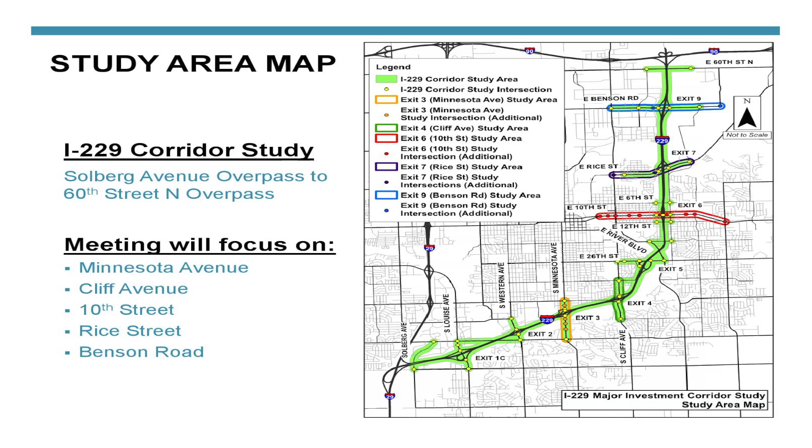But we already knew from previous studies and levels of congestion that at Minnesota Avenue, 10th Street, and Benson Road, we were going to do larger scale corridor studies. And so as we've gone through this entire process, we found out that we had a couple other locations that potentially needed some improvements as well. And so about a year ago, we kind of stopped what we were doing and we added the Cliff Avenue corridor and the Rice Street corridor in. And so we did some additional evaluation on those crossroads as well. And so we'll share that information with you tonight.

This corridor has served us well for many years, and so when the DOT and the city and the agency folks set forth to do this study, what they really wanted to identify is how do we keep the same capacity on the corridor over the next 30 years, the next 50 years. And also, we have some areas that we've had some safety issues along the corridor, so how can we address those moving forward?

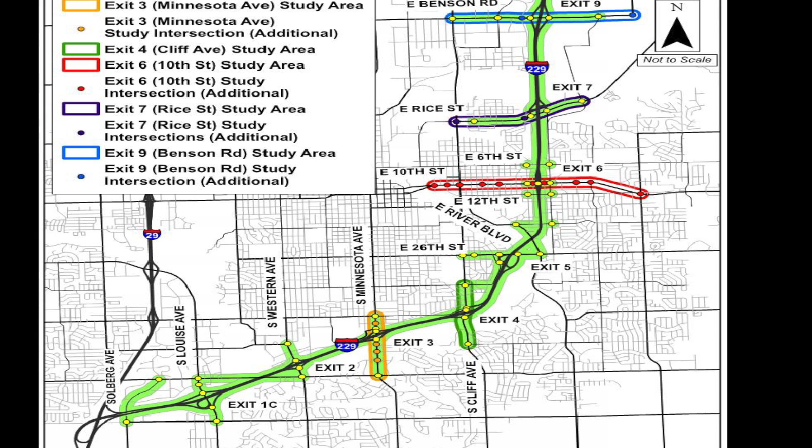These are the agency partners that were involved, the South Dakota DOT, Federal Highway Administration, the City of Sioux Falls, the Sioux Falls MPO, and I just wanted to highlight the South Dakota Highway Patrol because of some of those instances where they have to deal with crashes and try to communicate with others along the corridor, which is very difficult if you drive it every day. They really wanted to bring that to the table and say, if something happens along the corridor, how can we communicate that to people that are driving up and down the roadway so we don't have those secondary crashes or even further crashes that take place. So we're happy to have them as a study partner as well.

The presentation agenda is very simple. I'm going to quickly run through, starting on the I-229 specific upgrades. I'm going to go through the sub-studies and we're going to look at the improvements that we're going to carry forward. I'll spend a little bit of time on each individual matrix, but not a whole lot of time.

Those are in the back of the room. I can really get bogged down, and any of those that you have questions on, we can get to the boards after the meeting and talk more about that. The other thing that we have underneath all of the interchange options for any of the sub-studies, we've done some detailed renderings. And so you can kind of get a real world view of what it would look like on an aerial background. I think they're very helpful for you to see, if that solution would be implemented, really what it would look like.

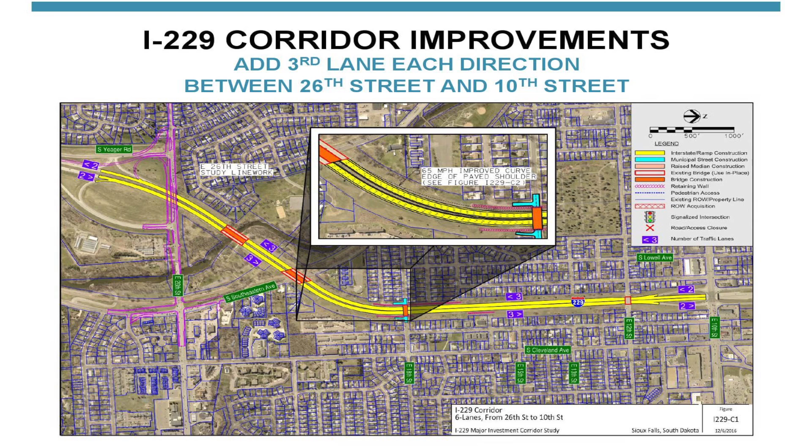And with this study, along the corridor itself, that was really the area that we focused on, that we know we need to do some lane additions. Between 26th Street and 10th Street, right now we just have 2 lanes. We're at that point now that we really need to look at adding that additional lane, so we have a 3-lane section between those. The other thing is between the bridges we have an overpass that exists at 18th Street. The design curve that was in there was about 55 miles an hour, and the corridor is signed for 65.

So if you drive it every day like I do, you go through there and you have advisory signs to slow down. And so we have a couple different options. If you look in the little box right here, you'll see it flip back and forth. We've done some design to look at making that a 65 mile an hour curve. We've got to put up some retaining walls to do that, but it would make the corridor consistent all the way through, which we think would be beneficial.

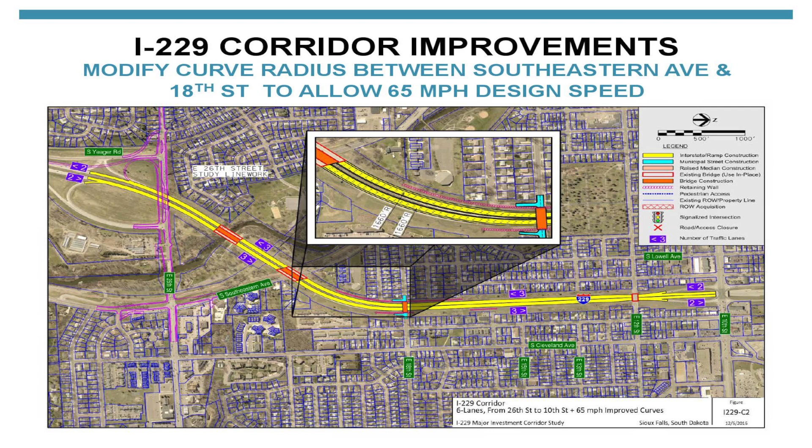When we look at some of the safety problems that we've had, it has been in this area primarily in inclement weather times where we've had slippery conditions. The South Dakota DOT did do some surface friction treatment just a couple years ago that actually has worked pretty well. And so we're happy to see that and be able to integrate that on future projects. But out of all of the corridor, that study that they did in the late 90s really held pretty true. And so this is the identified mainline improvements that we need on the corridor.

As we do any project, one thing that we always want to try to accomplish is serving our multimodal folks better than maybe we have in the past. And so at all of the locations that we cross Interstate 229, we've looked at what improvements we can make in regards to either sidewalk connectivity or for our biking community. As we looked up and down the corridor, each interchange was specifically looked at to see how conducive it is, how it works to get bikers across. Can they do it the same way as we get pedestrians across on a sidewalk?

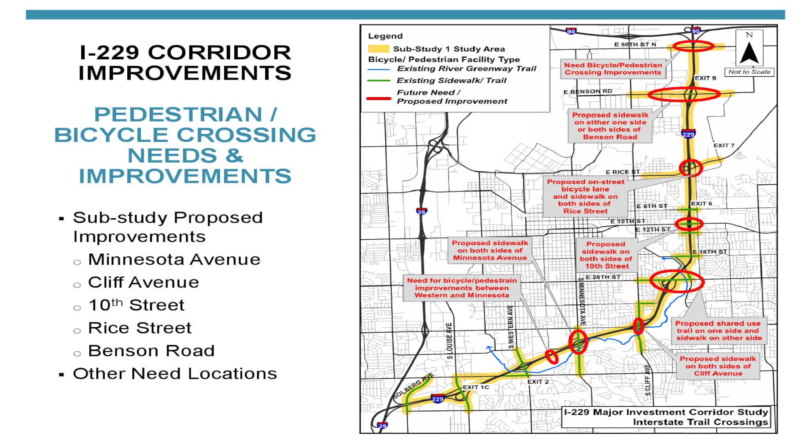And so this is just some ideas that we have, and it'll be fine-tuned as it goes into final design. But as we go up to 60th Street North, just a few years ago we finished the 60th Street North feasibility study, and we identified at that crossing in the future it'd have a shared use path off of that corridor that would be 10 foot wide.

And the idea is then we would have on the north end of the city, we'd kind of have a corridor that had the ability for those that wanted to bike or walk on a lot wider path, and it would get folks all the way over to our new South Dakota 100 or Veterans Parkway corridor. And so as we go on these different crossings, 60th Street North would be a location that bikers could use a shared use path.

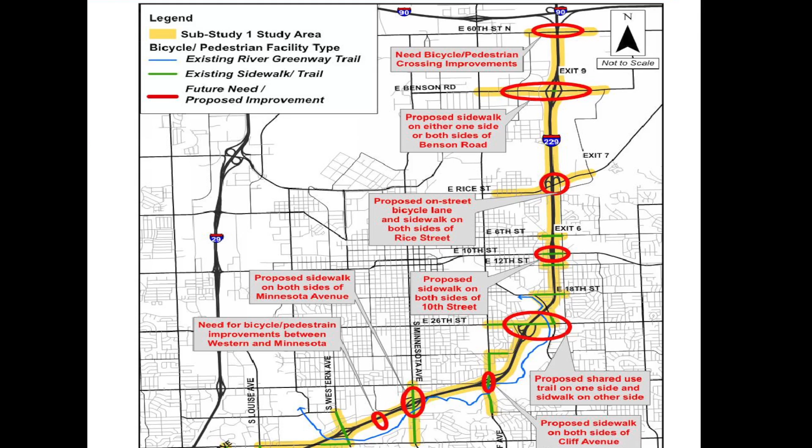As we go to Benson Road, the way that interchange options are setting up, it's more conducive to keeping just sidewalks at that location. As we go down to Rice Street, it currently has dedicated bike lanes on the rural section, and with the amenities of Great Bear and the trail systems, and really the connectivity with Brandon, we want to make sure that we're going to keep the bike lanes on street as we go through the Rice Street corridor.

As we go down to 10th Street, at our previous public meetings and also at our landowner meetings, there was a lot of concern with the congestion and the type of interchanges that we're proposing there, that it may not be the best place for bikes to be. And so in that location, the idea is we have 6th Street that's a crossing, 12th Street and 18th Street that are maybe a little more conducive for bikers, but we will certainly have widened sidewalks on 10th Street going across the interchange.

As we get down to 26th Street, if any of you folks were involved with that over the last few years, we completed the interchange report and the environmental document, and now we're in final design on that interchange. And we will allow for a path that will cross 26th Street that will allow access directly to the trail system. And so that's going to be a nice amenity. When we get to Cliff, we're kind of at that location again where, based on the type of interchanges, it seems like sidewalks are going to work better.

Now, as we get down by Tomar Park and Minnesota Avenue area, Yankton Trail Park, we're actually looking at maybe having a separated trail that would go over the interstate away from the interchange. We got a lot of things happening at the interchange in all of our options, and so that's probably one location where we'd have a completely separated location for people to get to the trail system coming out of some of those residential neighborhoods.

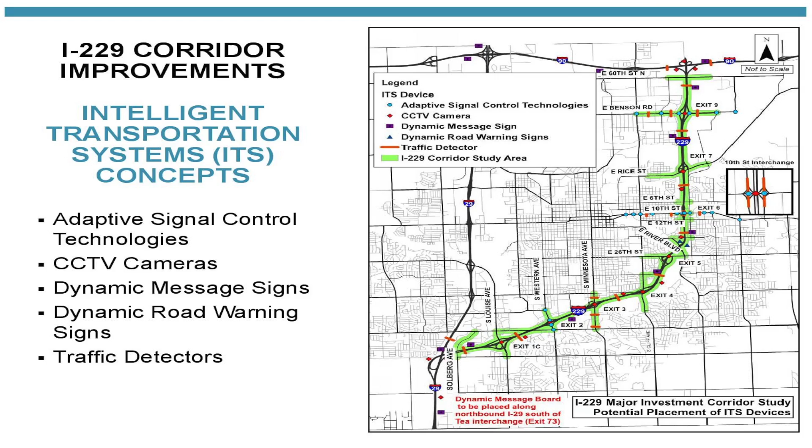So it's real-time cameras that are saying this is how we should set the timings for this type of corridor. And so the City of Sioux Falls just a few years ago deployed their first adaptive network on 26th Street, starting about by Yeager Road, and it goes all the way out past Rosa Park School. And so that was our very first one. They've got a lot of good data from that. The corridor has worked well. We've actually increased our traffic volumes because of it.

And so a couple other locations, the city had a press conference this morning along with the DOT and indicated that 41st Street is going to go to adaptive. We've also identified a few other corridors, Western Avenue and 10th Street so far, that we believe would benefit from adaptive signal control. And so really what that's going to do is it's going to have some benefits during the peak hours, and it's going to have significant benefits on the non-peak hours because it's going to be more reactive to the traffic that's taking place.

Right now when we do a timing plan, we simply are making estimates of the type and amount of traffic that's going through an area at a certain time. And so we set the signals to handle that traffic. This takes it to that one level further. In real time it's looking through cameras saying this is how much traffic is leaving one intersection, the next intersection needs to prepare for it, and this is how it's going to do it. So that's pretty exciting for us. A lot of cities haven't deployed technology like that, and so Sioux Falls, along with the DOT, is leading the way.

The CCTV cameras, really what those are, are standard cameras that the city or the DOT can use to look up and down their corridor. They can detect levels of congestion if that's what you're looking at them for. They can simply do surveillance. Let's say we have Jazz Fest going on, and so maybe they're going to watch the cameras and look at the congestion at the interchanges at Western and Minnesota, and they can adjust the signal timings if they see congestion. So up and down the corridor, we can have those cameras that provide us the ability to monitor the corridor.

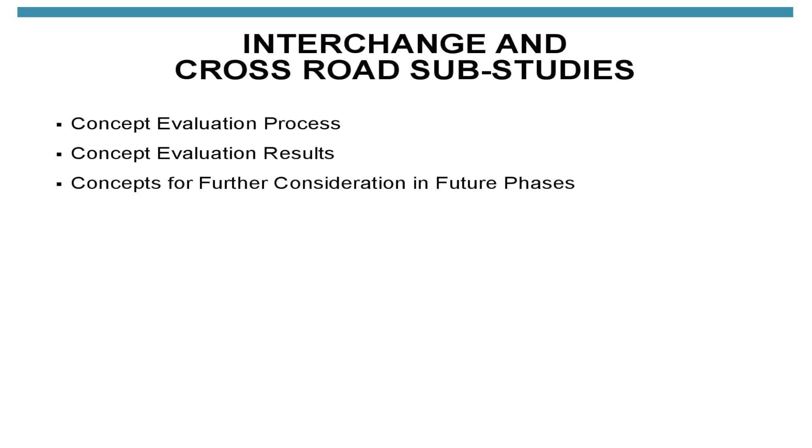So now we're going to hop into what we have for options on the different sub-studies. And like I said, I'm going to go through the options. Anything I show you tonight is something that will be carried forward into the subsequent studies. And all of those we have in the back of the room. And after the meeting, you can simply start. We have sub-study 1, and it goes 2, 3, 4, 5, 6, all the way around. And so you can follow, look at the ones that you'd like to, and skip the ones that you don't. But we'll kind of run through.

And so we were able, through a simulation, to look at the entire corridor and the crossroads all as one model and look at delay associated with that. And so it was different than looking just solely at one intersection or one corridor at one time. And what that model would do is if you constrained a corridor and there was a level of congestion, traffic would choose to go to another corridor based on travel time.

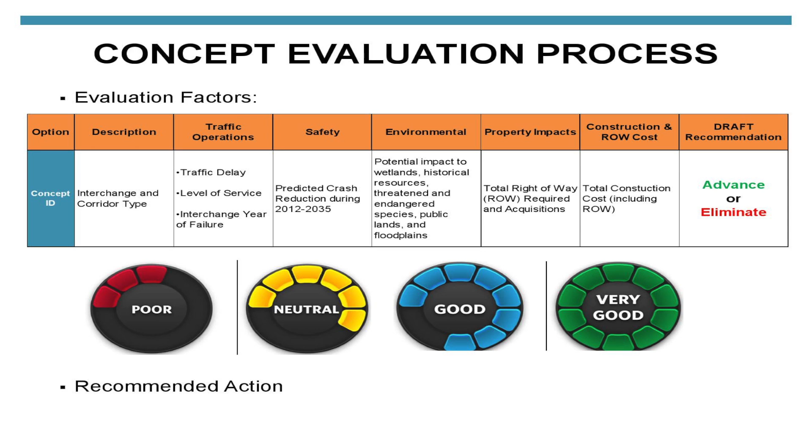And so when we look at traffic operations, that's one component that we used in our matrices to try to see how well an option worked. And so as we ended the study, we started taking our options, building them into the model, and seeing how they reacted. And so if they reacted well, that was probably something that we carried forward.

Levels of service, a lot of times you'll hear us talk about levels of service as A, B, or C. If they're one of those letter grades, that means the corridor is probably working fairly well. If it's D, E, or F, we probably have an issue. And so as we started looking at the Rice Street corridor and the Cliff Avenue corridor in our traffic analysis, we started to see some of those items pop up, and that's why we added them in as sub-studies to better evaluate those corridors.

And so we looked at all of the intersections and the interchanges specifically, and so our improvement options are going to be designed to at least level of service C or better. And so that way we know we can manage through that year 2035 or beyond. And then we also did an interchange year of failure. So if we looked at an alternative, we wanted to say, okay, if we implemented this alternative, how long would it last? And so it kind of gave us a gauge.

If we implemented improvements at one location, maybe it only lasts 20 years. If we implemented them at another location, maybe it's 30 years. And it gave us this idea of how we could maybe prioritize the improvements better. And so that was important as we looked in trying to figure out which interchange or which improvement would be done first.

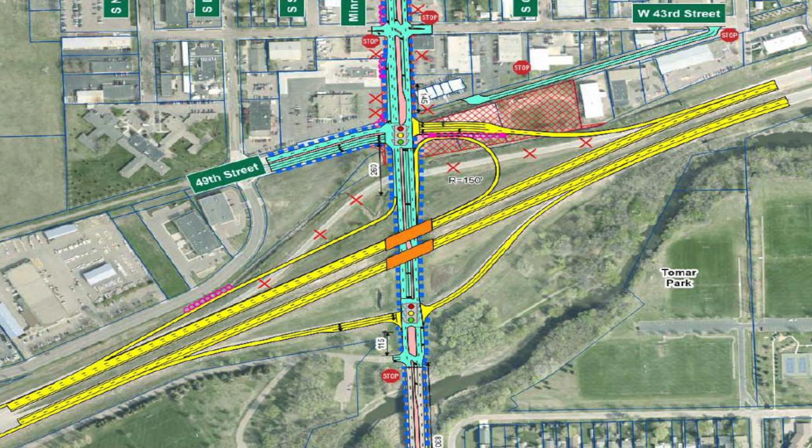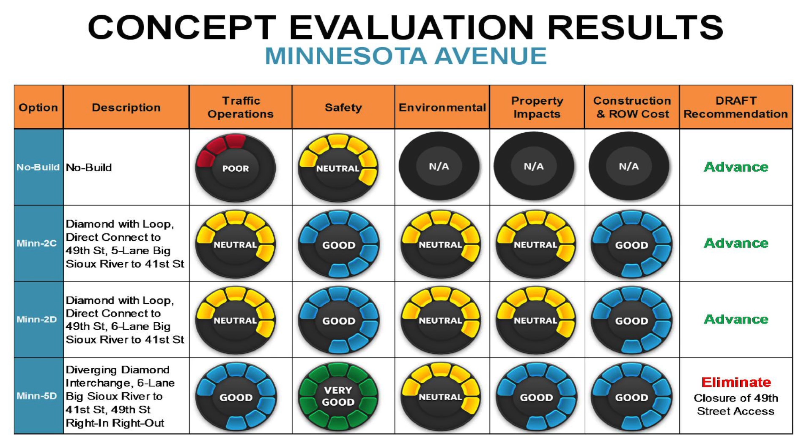And so the next group of options that we had for Minnesota was single point interchanges, and all of you are familiar with them, whether you know what they're called or not. I-29 and 12th Street, I-29 Madison Street, I-29 Benson Road, I-229 and 10th Street, they're all single point interchanges. And what that means is you have a common signal at one location and you don't have a signal on each side of the interchange.

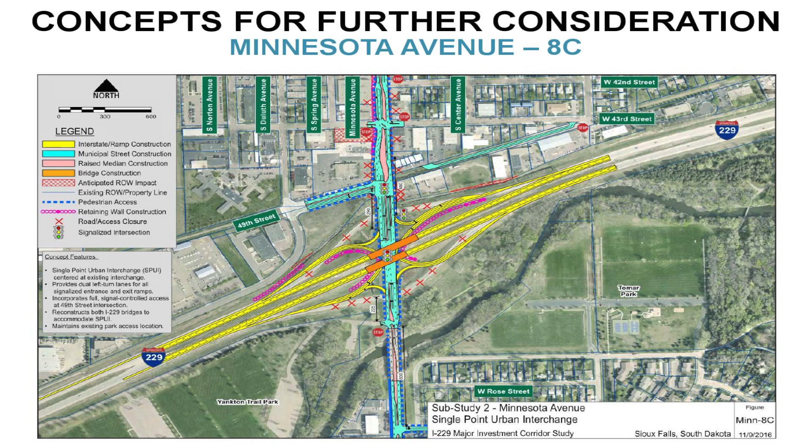And so we have a couple variations of this option. One is, this is a conventional single point with tight right turn ramps or right turn lanes. The problem is, in this option here, we're so close to 49th Street that anyone that would come off of I-229 to go northbound would be restricted from taking a left onto 49th Street, because we don't have enough room for these people to merge over and get into the left turn lane. So we actually would have a divider there that would not allow them to do that.

And so this is a similar option, just with a wider street. And then our caveat to that is, instead of having those folks turn in here, let's just peel the ramp farther away and line it up with 49th Street, similar to our loop ramp option that we had. And so if we do that, we're able to take the interstate traffic and they can either take a right, go through, or if they want to take a left, obviously they'd use the other ramp.

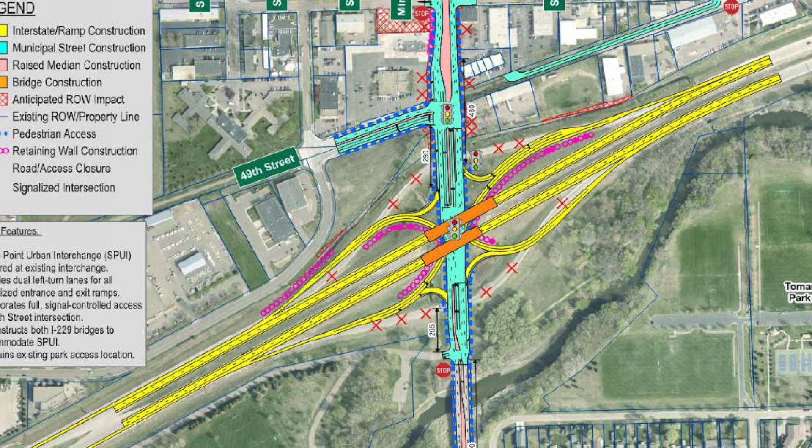And so there's a variety of options. Both of those allow us to have 49th Street as an intersection, as well as have an interchange that manages the traffic volumes that we have. Again, this is just the result matrices. And then we're going to keep going on to Cliff Avenue.

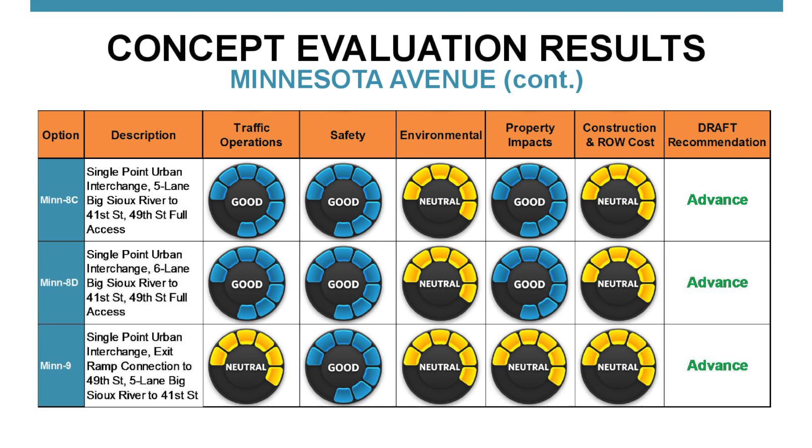And so Cliff Avenue, for the longest time, has had this interior ramp between the signal at 41st Street and the signal at the South Side Terminal. And so the real struggle with this was getting enough room for either the vehicles queuing to go northbound on 229 and those conflicting with the folks that wanted to take a left to get onto southbound I-229. And so really what this does is, similar to Minnesota, instead of those folks taking a left here, we simply would put them on a loop ramp and take them around the outside. And we're getting rid of that congestion from taking place.

And so if you drive this corridor a lot, this is primarily the congestion area. We have a high peak volume in the morning with the school traffic. Certainly that's kind of dissipated in mid-afternoon. The PM peak hour through here actually works better than in the morning. And so this is one option to manage that. As we widen Cliff Avenue to the north, we certainly have some residential property impacts, and so we're trying to look at solutions to minimize that.

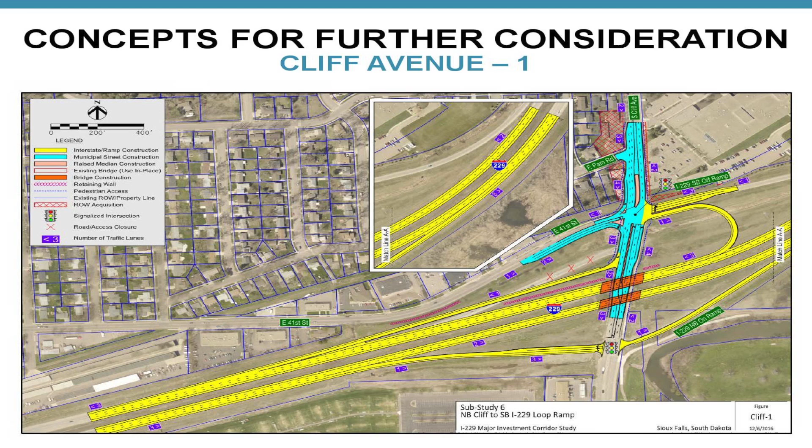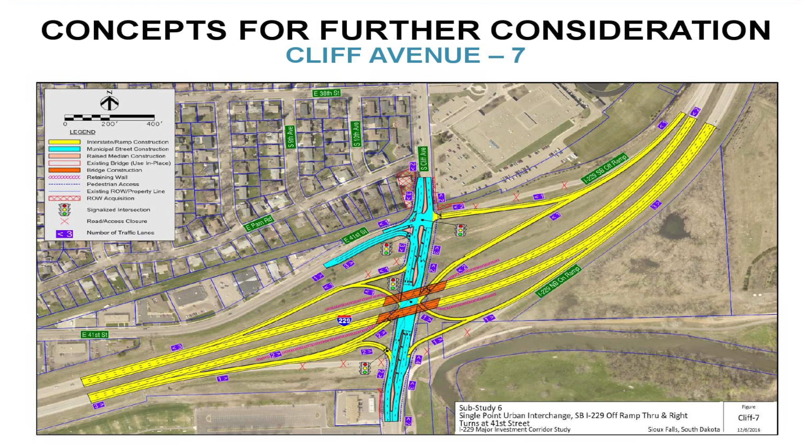And so we looked at kind of a combination of the options where it's very similar with the single point interchange and realigning this ramp again like Minnesota over to Cliff Avenue to the signalized location, and that does meet our safety and level of service criteria. So that in itself becomes a good option, and it shows the least impact to the homes along Cliff Avenue.

Again, this is the comparative, and each one you are going to see the no build, because when we carry it on to the next studies, we've got to make sure we compare it to that. And so on the traffic side of things, we're in pretty good shape as we look at these options. As you can see, the one option, we had poor when we had the dealings with all those acquisitions.

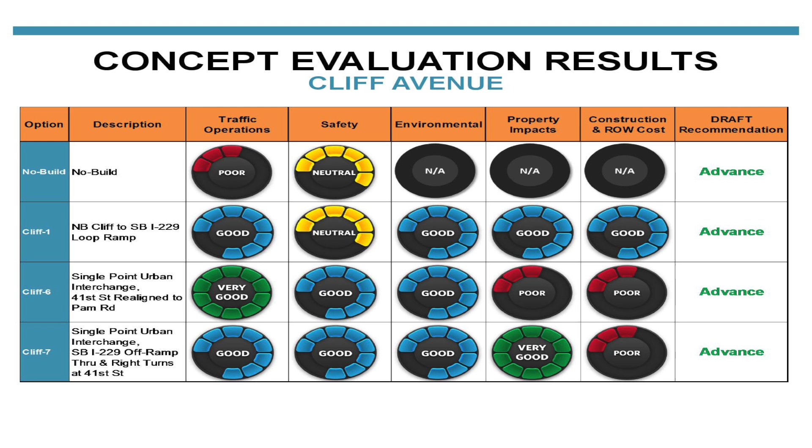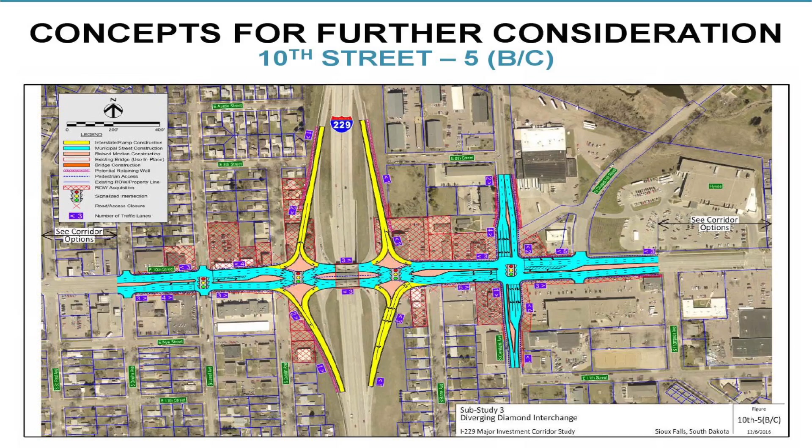When we look at this interchange here, it does a very good job of moving traffic on 10th Street. The left turns now become free movement, so when this movement here is stopped, all of these left turns can enter the corridor at an uncontrolled location. I think over the next 10 to 20 years, this will probably be the leading interchange geometric design in so many communities, because they retrofit really easily to the old standard diamond interchanges.

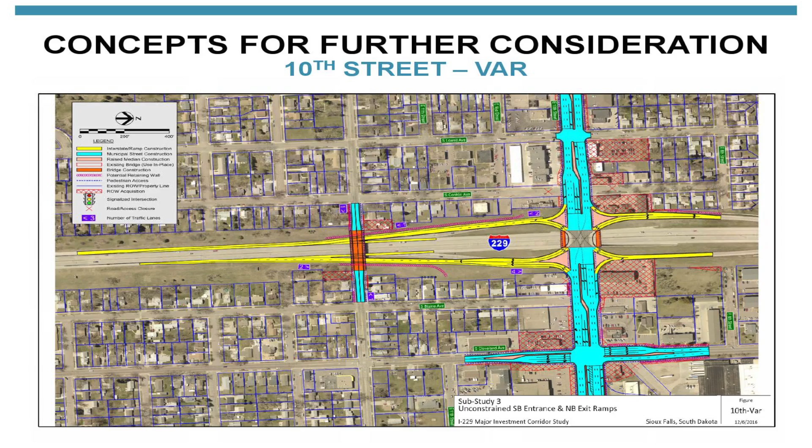One other consideration that we had is when we start looking at this heavy right turn movement and heavy left turn movement, one thing that we would like to provide for is lane balance. Right now, people get off, and every once in a while you see a sneaker come in and use the inside of that lane up to 10th Street. Since these movements are generally comparable, putting a dual lane off ramp there would provide for that lane balance and a little higher level of safety along the corridor. We'd also look at extending this ramp due to the high volume of left turns coming off of it.

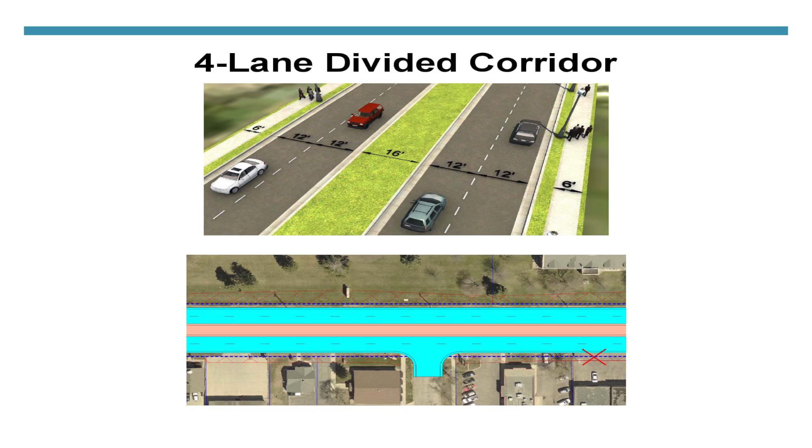Along the corridor, we evaluated it at a 4-lane, 5-lane, and a 6-lane. 5-lane is what's out there now, with the 2-way left turn lane. A 4-lane would be 2 lanes in each direction with the raised median. A 6-lane would be 3 lanes in each direction with the raised median. What we found is for a majority of the corridor outside of this interchange, we can manage the volumes pretty well with the 4-lane section. So you'll probably see the 5-lane exist there for quite some time.

But at some point in the future, as traffic increases, having that median in the center to restrict some of those left turns out of all of the driveways and the side streets provides that little higher level of traffic safety, and that's what we're going for. It'll probably be quite a ways down the road before that would happen, but that's something that we have identified for the corridor.

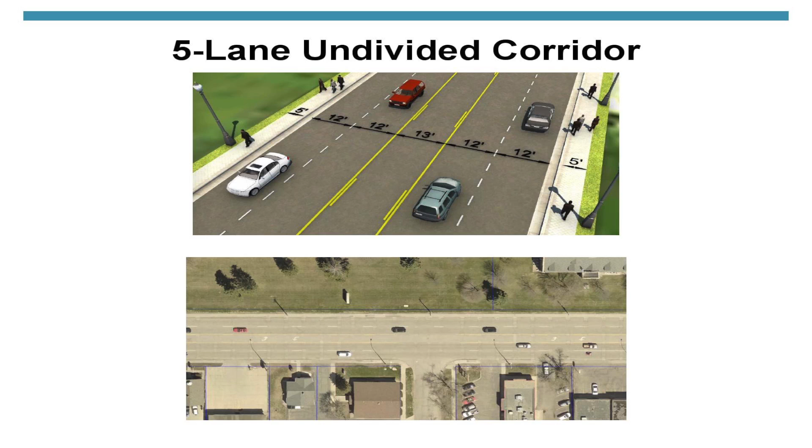This is simply what's out there today: 5 lanes, about 12-foot lanes, and people can turn out of that center left turn lane. There are a couple areas by the VA hospital, and also as we get close to Sycamore, where we don't have any development on one side of the road. That really helps us as far as not having a bunch of driveways in those locations. It keeps traffic moving on the corridor.

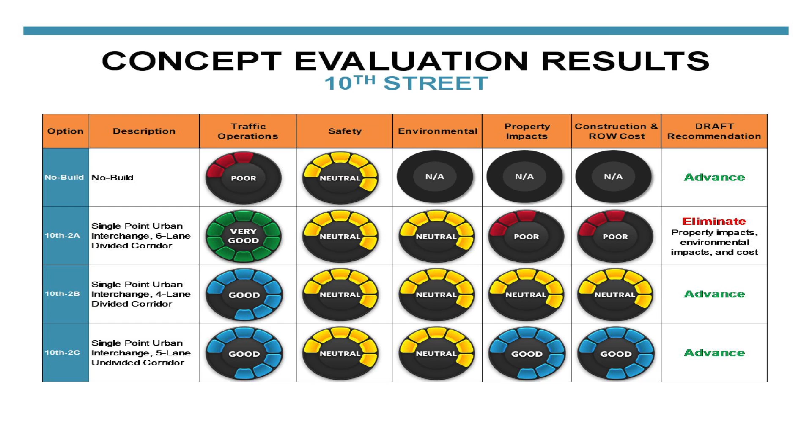We're going to keep moving along the corridor to Rice Street. Rice Street, this is an interchange that probably has one of the lower levels of traffic today. This intersection here was signalized just a few years ago, finally met the warrants to do that. But with the increasing development that takes place on the northeast side of town, the increased development in the city of Brandon, all of the area around what will be the Veterans Parkway corridor, we have identified some strong growth along the Rice Street corridor.

And so to manage that growth, we have some additional lanes that we need. We're looking at from Bahnson Avenue through the interchange that will go to a 6-lane section. Outside of that at this point would go back down to 2 lanes in each direction. This would simply be a retrofit of the current interchange, so it'd be a tremendous amount of turn lane additions is what it amounts to. Additional right turn lanes and additional left turn lanes.

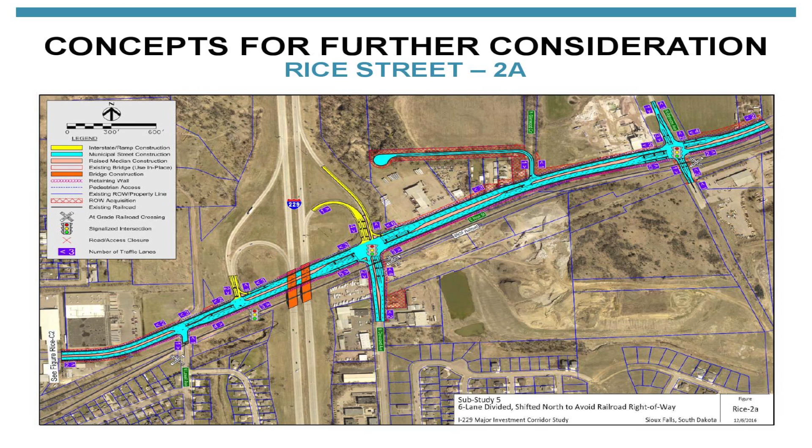One of the concerns that we have is at some level under this design, that intersection gets so large it starts to break down. And so for that reason, we looked at maybe one more option that was a little more out of the box than some of the ones we've looked at, was a realignment of Cleveland Avenue that would take us over to Bahnson.

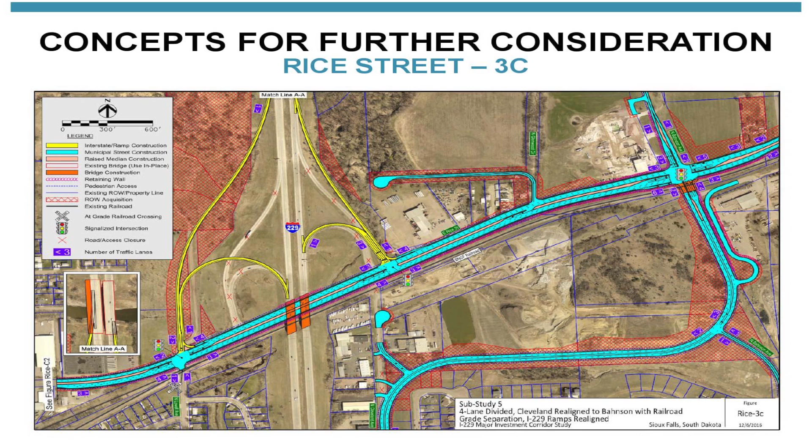And what we do is we take a high level ramp and we don't have that opposing traffic on the south side. We take a high level Cleveland Avenue and we don't really have that opposing traffic on the north side. And so those intersections we can manage better, getting them on and off Rice Street, and that option works very well to manage our traffic. The biggest thing is it's a significant amount more road to construct, and we have some issues to work with private landowners. And so both of them handle traffic. This one maybe would handle traffic for a little farther out in the future than the other one.

On the corridor itself, as we start going towards the downtown area, certainly as we revitalize and keep developing downtown and have a conscious effort to try to get Rice Street pushed over to Russell Street, we want to preserve this corridor as another east-west route. And so implementing the median due to all of these blocks that connect, that's just something that we'd like to do over time to try to increase the safety along the corridor. Right now we have a significant amount of locations where people can take rights and lefts and all of the things on and off the corridor, and by implementing the median at that location, we start reducing some of those conflict points.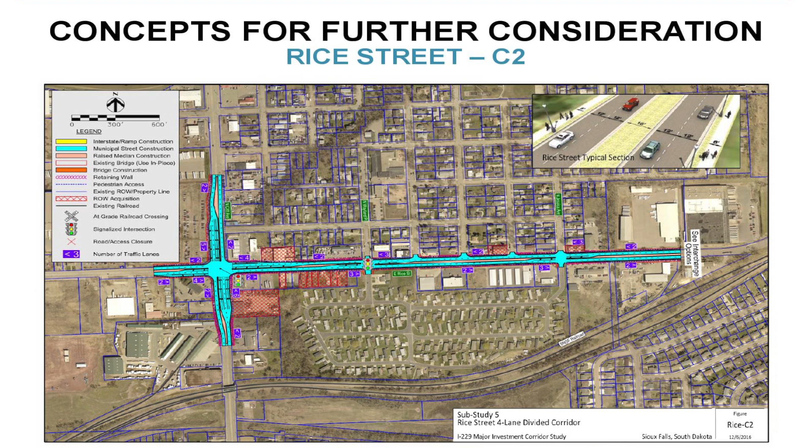Again, here's the evaluation of results. Looking at the traffic operation and the safety, what we're carrying forward, they all do a very good job of managing that. Now we're getting over to Benson Road, which is kind of our last sub-study to the north.

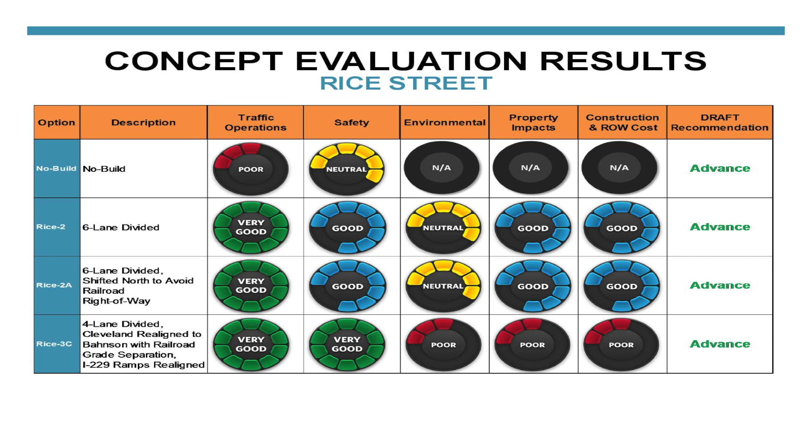A little history on this interchange. As we come at 229 in the morning, this volume is significantly high. It's probably one of the highest ramp volumes in the city right now. We're running between 1,600 and 1,700 vehicles in an hour up this ramp and then into the commercial park that exists. And so our concern is, as development takes place on the east side and we need to provide more time at the signal to manage that traffic, that the interchange is going to have some significant problems.

And so to manage that, we looked at placing a loop ramp, a dual loop ramp that would take traffic. If you wanted to go on Benson Road to the west, you'd simply come off of this ramp. You'd have a free movement that would go onto Benson Road. And we have a dual ramp that would come off. We have 2 lanes in the through direction. And so we'd actually carry 4 lanes over to Potsdam, 3 lanes over to Lewis, and then we'd go back to 2 lanes.

And that's what we need to manage that amount of traffic on that loop ramp. The other obstacle that we have is if we have that much traffic in the morning, we have a similar amount that wants to come home at night. And so we get this very long queue that exists in that outside lane on Benson Road coming back in the evening. And so we've looked at a couple different options.

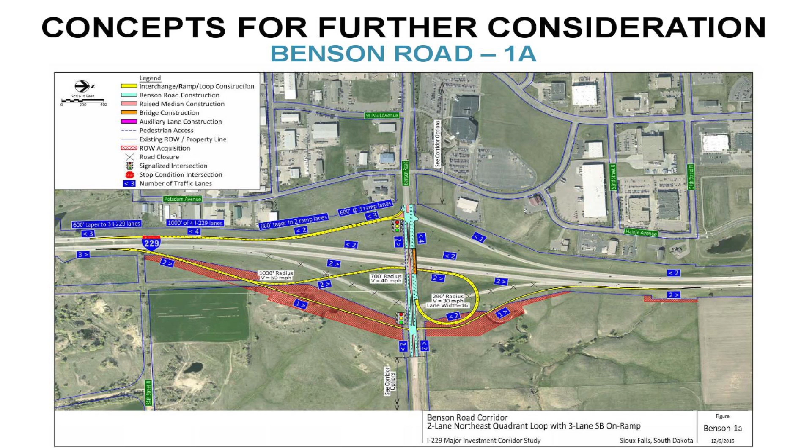The other option that fits inside of our right-of-way, which is very nice, is a diverging diamond interchange. The complexity of this is a little more than normal. We actually have to have 3 left turn lanes coming off the ramp terminal. We'd carry 4 lanes across the structure, drop 1 at Potsdam and 1 at Lewis, just like in the other alternative. And so that's really the way that we can manage the traffic capacity that we need.

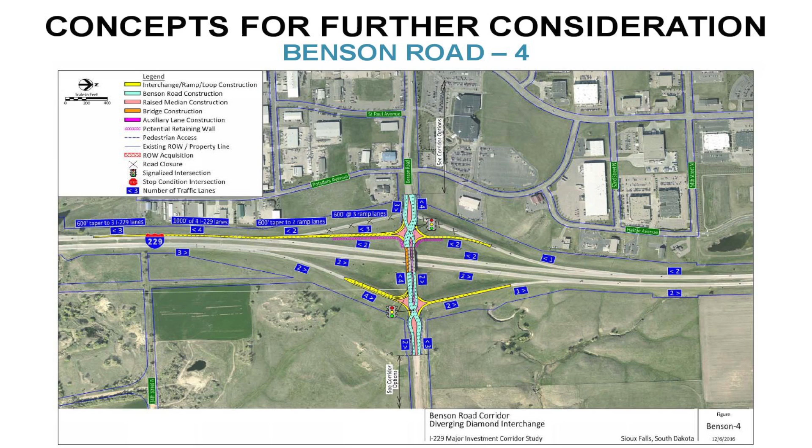And so, again, both of those manage the traffic. The loop ramp option would probably carry out and manage it a little longer in time. And so what does this all equate to? It equates to a lot of projects over the next 20 to 30 years. And so this is our priority matrix that we've developed.

And I can honestly tell you that it's our best shot at the order of the improvements. And by no means does that indicate this is how exactly it'll go. There's a lot of money that needs to be spent, but I'll briefly indicate what we feel at this point.

And so 26th Street, if any of you guys have any desire on that interchange, we studied that outside of this corridor. That was completed when we started it. That interchange project is in design, and so that will be constructed a few years from now. But we do have a board on that here tonight if you want to look at that.

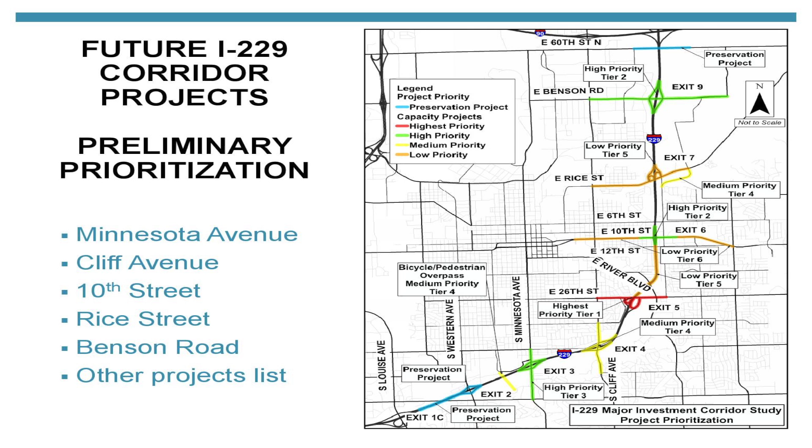The next interchanges that we would look at construction would be 10th Street and Benson Road. The order of those is to be determined, but those are the ones that showed kind of the highest level of need when we put all of our numbers together. Benson Road, simply from a perspective of we have less land to buy, may be a little easier project to push forward than 10th Street, because 10th Street has quite a few acquisitions. But both of those are tiered similar in our scale.

The next one would be Minnesota Avenue, and then close behind that would be Cliff Avenue. And so when we look at these improvements, each tier maybe represents 5 to 8 years difference. We're hoping that maybe the first, 26th Street, that's about 2020 timeframe. The next ones could be 8 to 10 years after that, 12 years maybe. The next tier, maybe another 5 years out, and we get to those bottom tiers another 5 years. So we are telling you this is a 20 to 30 year plan.

And so when you look at a couple $100 million plus, certainly the DOT and the city need to figure out how to fund that together in order for these improvements to move forward. And so, like I said at the beginning, you're probably going to be a little frustrated if you came for some defined timelines, but that's really the best that we can do.

What I can tell you is if you live on one of these corridors, when we would engage you again along a corridor, the process to go from the studies we still need to complete to construction is about 5 to 6 years. So if you do live on a corridor and you are engaged, that probably means we're going to put you in the cycle to start working on a project.